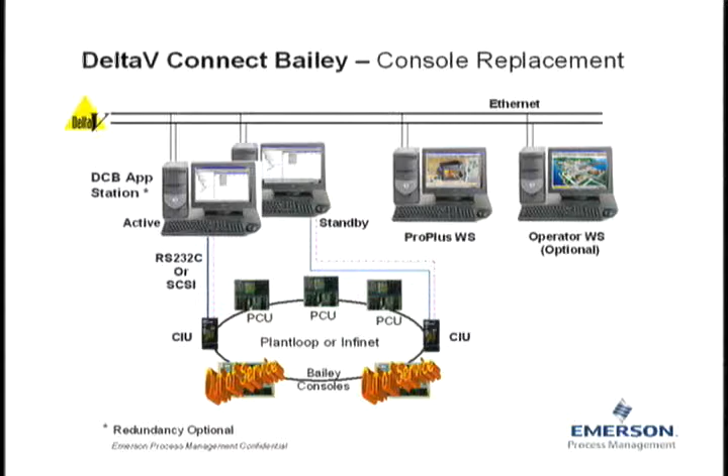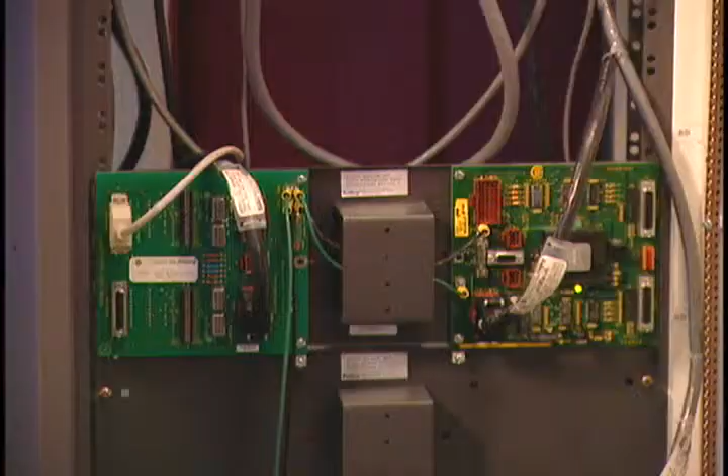On the DeltaV network, then you see the ProfessionalPLUS, which is the engineering workstation for the DeltaV system, and operator station as needed. Now, looking at the hardware in the cabinet that we have here in this demo, we have the Bailey CIU, which is in a Net90 rack or Infi90 rack. It's a CIU01 with the termination panels, the TCL, and a TMF. We actually take our application station and connect it to the serial port on the termination panel for that CIU.

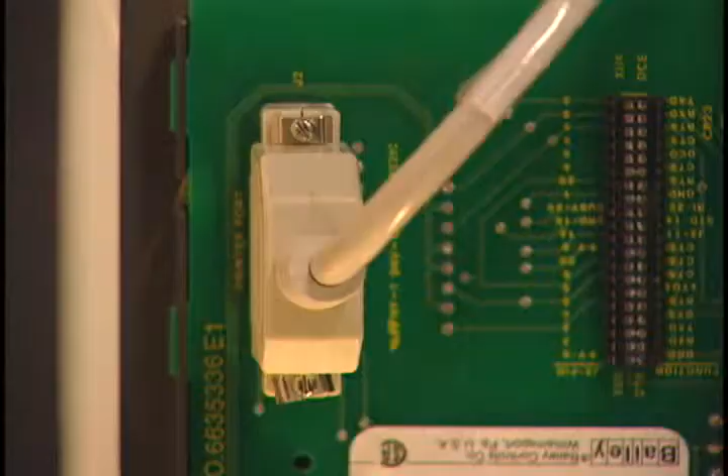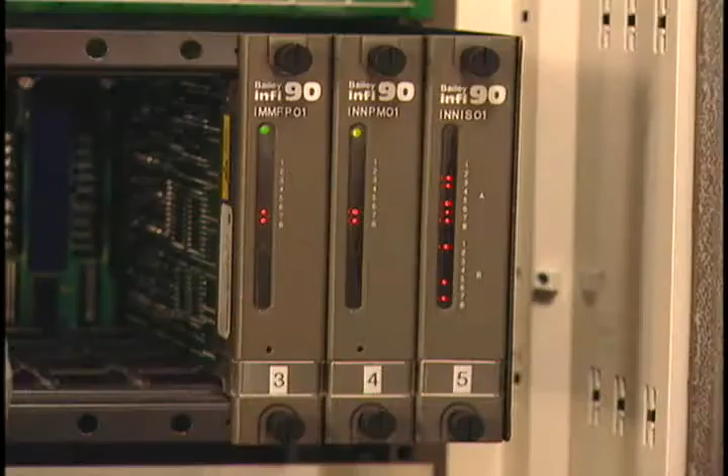And that's all we need for the DeltaV Connect for Bailey solution, because our application station connects to the termination panel of the CIU, and it will give us access to all the data that is in the Bailey system. In this case, we have a process control unit, NIS NPM pairs, and one MFP controller. This is where all our configuration resides, and we have access to it from the DeltaV Connect Bailey application station.

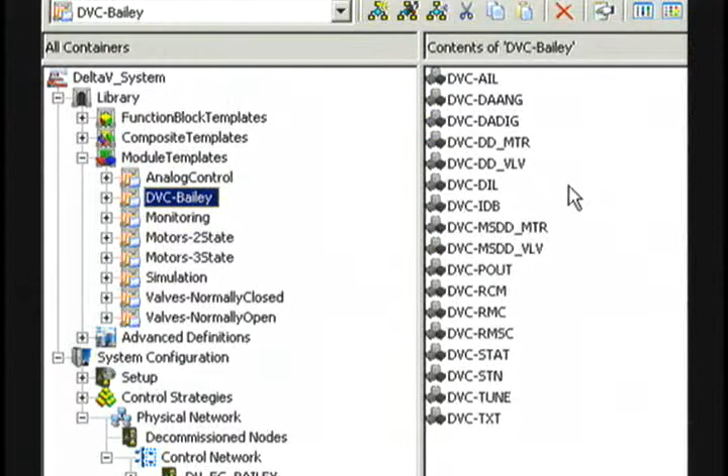Once DeltaV Connect for Bailey is loaded on your DeltaV system, under the library and under the module templates directory, we have a new folder called DVC-Bailey. This folder actually has module templates that are created specifically for the DeltaV Connect Bailey interface. And if you look at these templates, they are referencing the Bailey exception report blocks.

AIL is a Bailey exception report block, DAANG, DADIG, device driver, MSDD, RCM, station, text block, and so forth. So we do have a template created for each one of the Bailey exception report blocks. That's how we get access to the data on a DeltaV station. We create shadow blocks for each one of the exception reports off of the Bailey data highway.

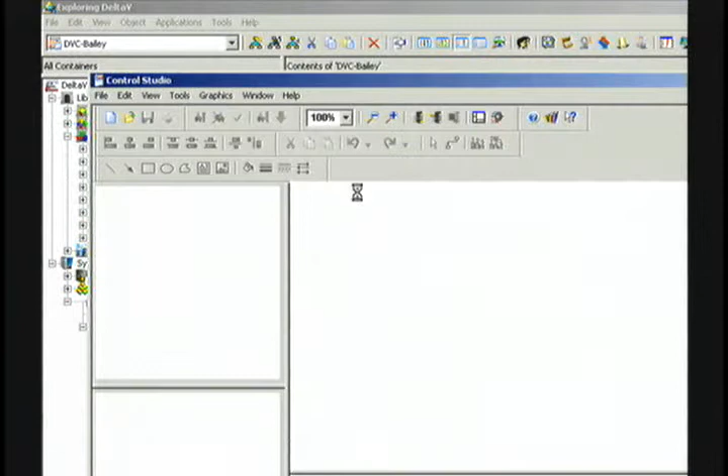Now, one template in particular that's called IDB has the IDB block in it. This is the interface definition block that we want to look at in detail. We open it with Control Studio, which is the configuration engineering environment within DeltaV. IDB, this is the block that sets up the communication between DeltaV and the Bailey systems. It has a number of parameters, but in particular, there are a couple that we are interested in.

The first one being the scheme. This will set up your interface, whether it's a single interface with redundant channels where we can actually connect to both ports on the CIU, whether it's dual interface where we can have one application station connected to two separate CIUs, or whether it's a simulate interface. In this case, we are using a single interface.

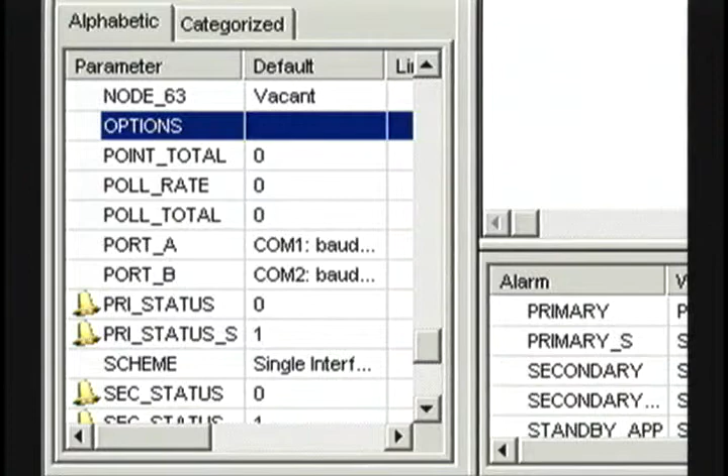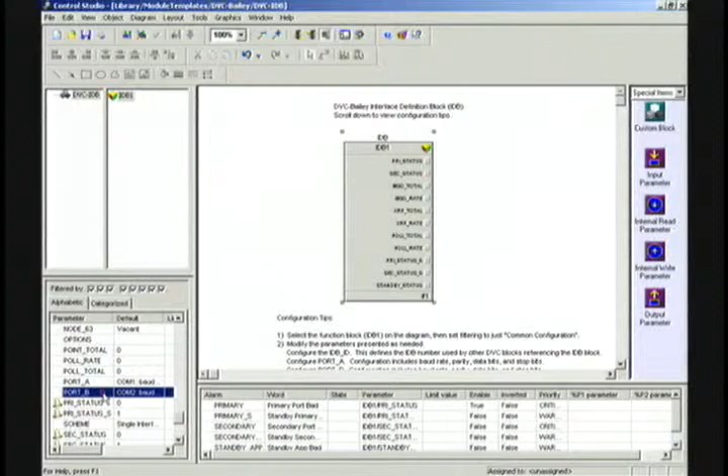One other parameter is the port A and port B. If we are connected to one serial port, we get about 300 points per second. If we're connected to both ports, we have about 500 points per second. The main thing that we need to set up here on this parameter is the baud rate, which should match the CIU baud rate on the Bailey system. So if we have a second port, we would configure port B the same way. We save this block and download it to the DeltaV application station that's running the interface.

Well, let's take a look at another module template so we can get an idea about the different parameters inside them. We'll take a look at the station, which really matches the station block in the Bailey system. Open it with Control Studio. Okay. As you see, there's only one block in this module template, just like the rest of them. We have a shadow block to match the exception report on the Bailey system.

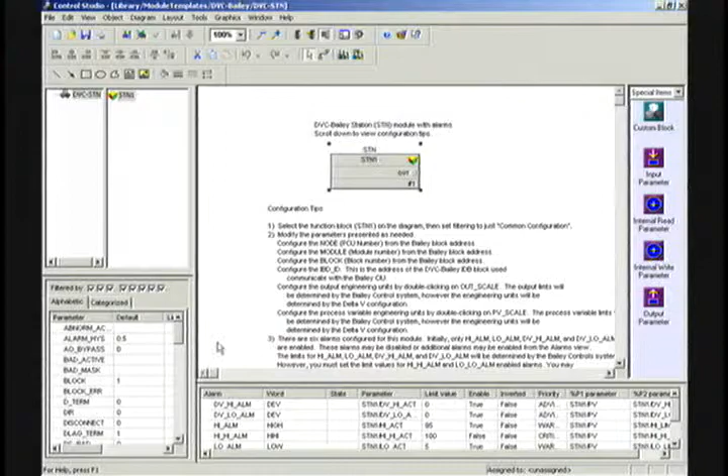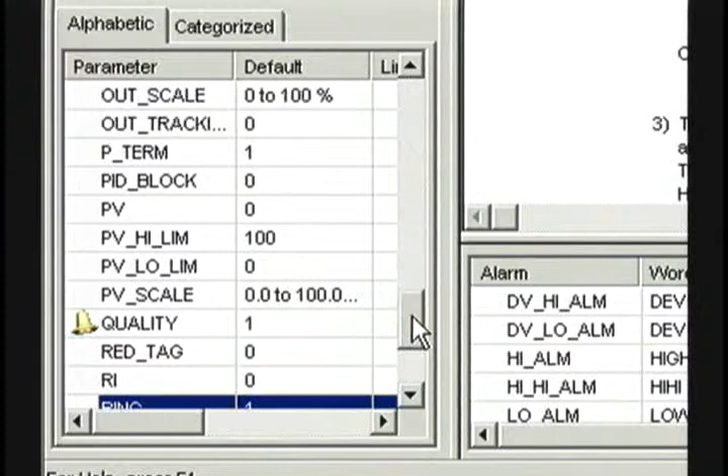And all we need to set up in this block is really the address of the Bailey station block where we're going to get that data from. One being module, we have to set up the module on it; node, which is the PCU equivalent; ring, which is the loop or the ring; then block, which is the block address inside that module. Now, after we've done the configuration for the interface, let's take a look at the DeltaV operator environment.

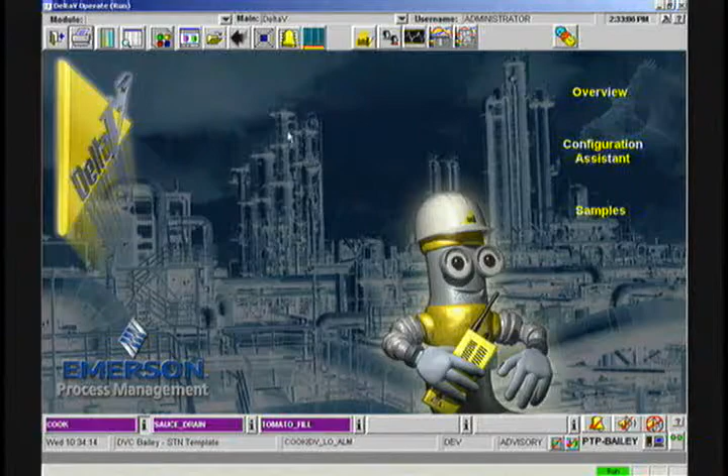Let's take a quick look at the interface. As we mentioned earlier, the module templates that we have provided in the library all have faceplates associated with them. This is the faceplate for the interface definition block, or the IDB block. And as you can see, it tells us that we have the primary port active. In this case, we only have one connection to the CIU. It is online. The secondary port is not being used.

At the same time, it provides us information on the CIU that we are connected to. It's an INICI01 in this case, and it's ring 1 node 2. And it is a time sync master.

We do have time syncing enabled between the DeltaV system and the Bailey system. Besides that, we do get some information about the data that we are transferring between both systems, some of the exception reports and the messages and so forth. So it's very, very useful information to the operator to see how the interface is working and performing.

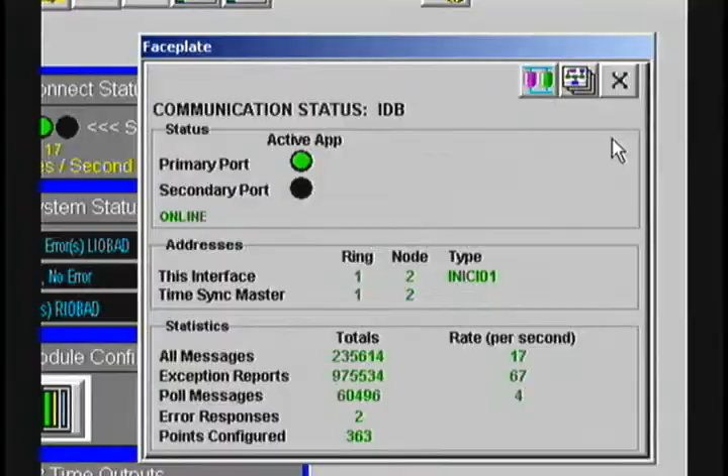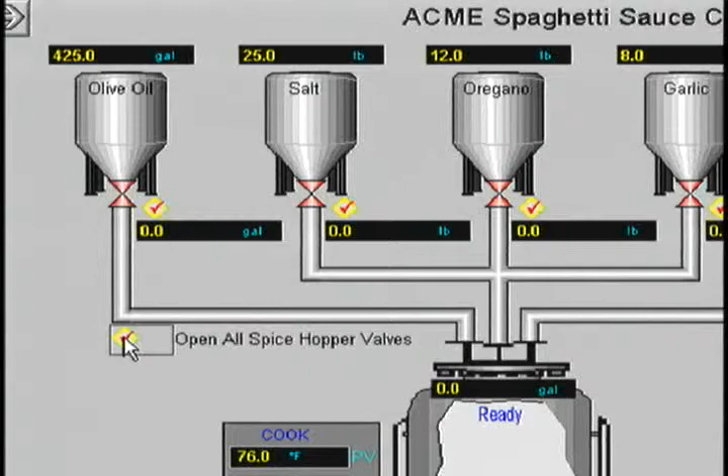Let's take a look at some other screens in this case. Here's one where we are making spaghetti sauce. Just to give you an idea, we have configured modules here for each different type of the Bailey exception report blocks. In this case, I can click on this. This will open up a faceplate. It happens to be a device driver. It tells me I am permitted to operate it.

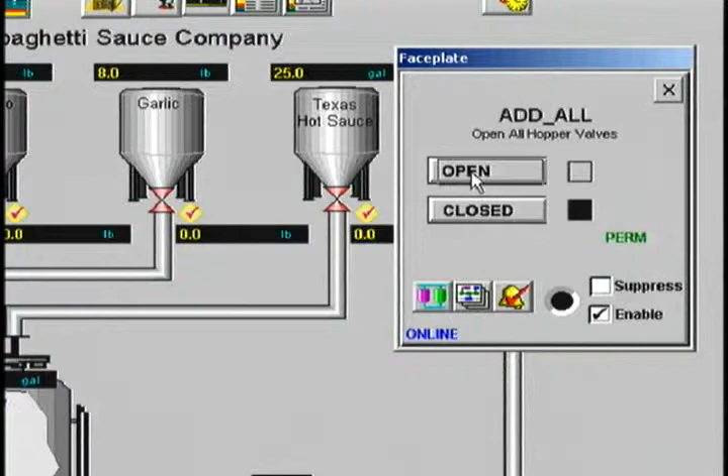One piece of information that's good here, it tells you you're online, which means the interface is working and operational. If it says offline here, that means I know there is something wrong with the interface. I can go ahead and open. This, in fact, opens all these valves to add the ingredients for our sauce that we are making, all the dry ingredients.

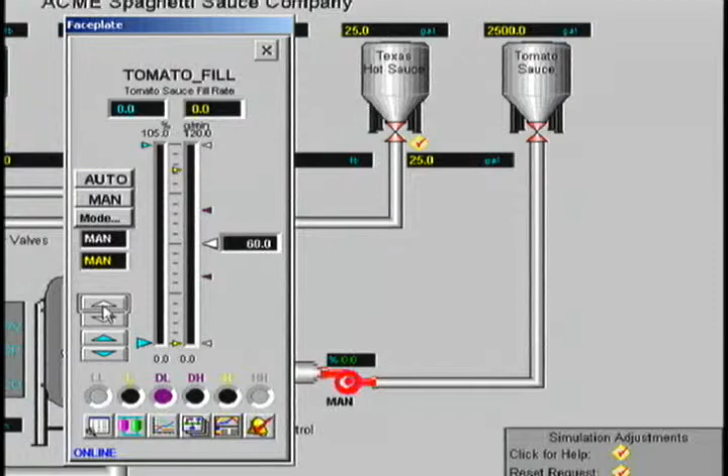Now I can click on this. This will open up the faceplate to add the tomato sauce, this pump. These faceplates, as you can see, are similar in the look and feel to the Bailey displays. They will provide you all the information that is important to the operator to control this PID loop. We've got the modes, whether it's auto or manual, or you can change it from here. We have the arrows to change the set point and the control output based on the mode.

So for example, right now we're in the manual mode. If I hit auto, it's gonna go to auto mode. And it started the pump, and now we're starting to put in some tomato sauce. I can go in and change the set point, either by clicking on these arrows to go up, or I can actually take the set point here and just drag it up to put in a new value.

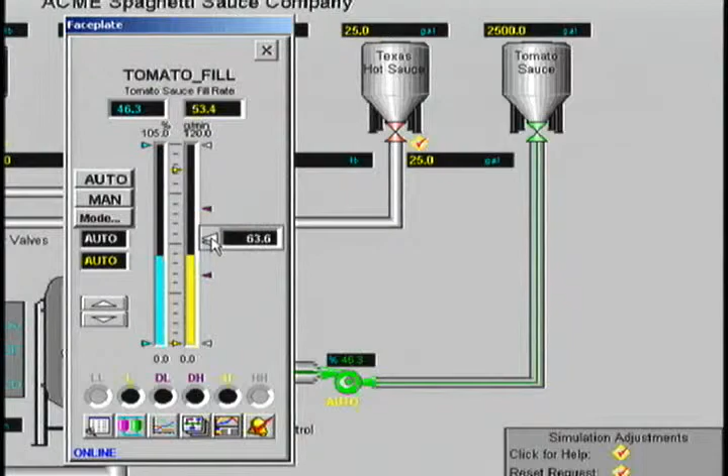We provide additional buttons on these faceplates to give us access to additional data. For example, we provide a detailed faceplate that's accessible from this faceplate that will give us the parameters for that particular point, the high and low and so forth, which are tunable from this screen too, and provide us the information on the PID block associated with this station. As we know in the Bailey system, we got a station block and a PID block that are separate. The PID block does not have a faceplate associated with it, so we provided that information on this particular faceplate to allow the operator to look at the PID block and actually tune its parameters from the screen too.

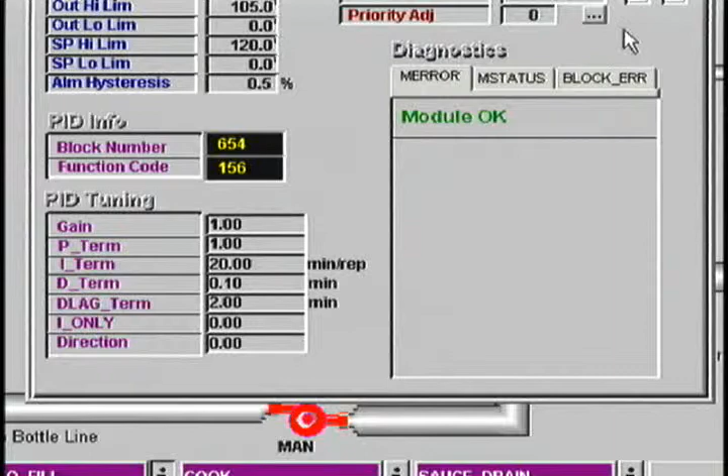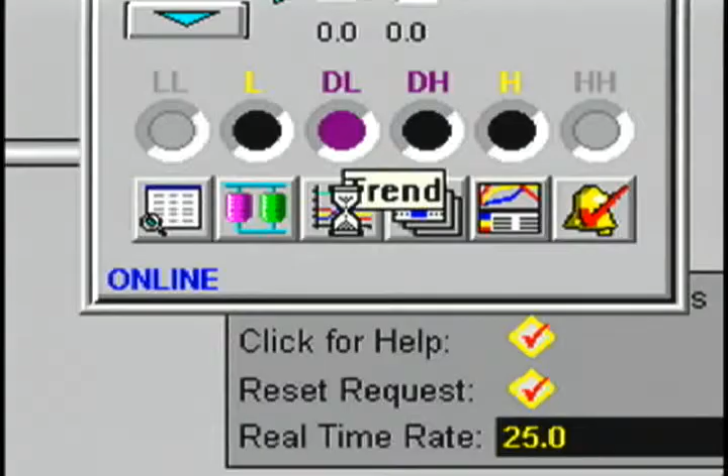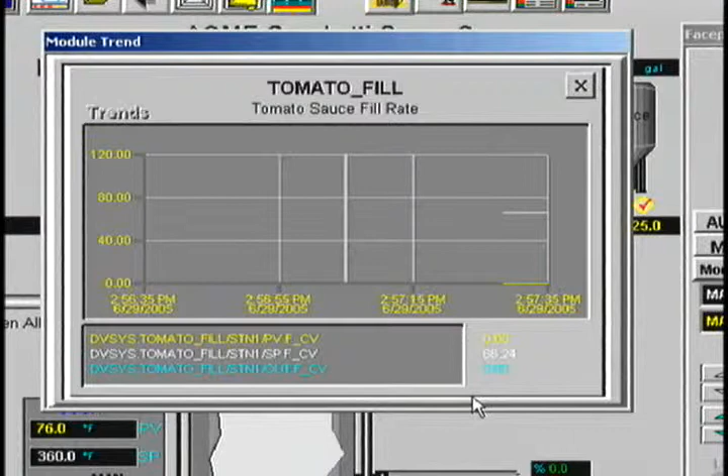In addition to that, we do provide the capability of enabling and disabling alarms from this screen, provided the operator has that access level. Okay. Some of the additional buttons on this faceplate are one that will take us to the primary display, which we are on right now. The other one takes us to the trend, which in the DeltaV system, every point has a trend associated with it, built in automatically, so you do not have to configure that separately. And in this case, we've got this trend, which is really the current real-time trend. You've got the process variable, the set point, and the control output trend in this case.

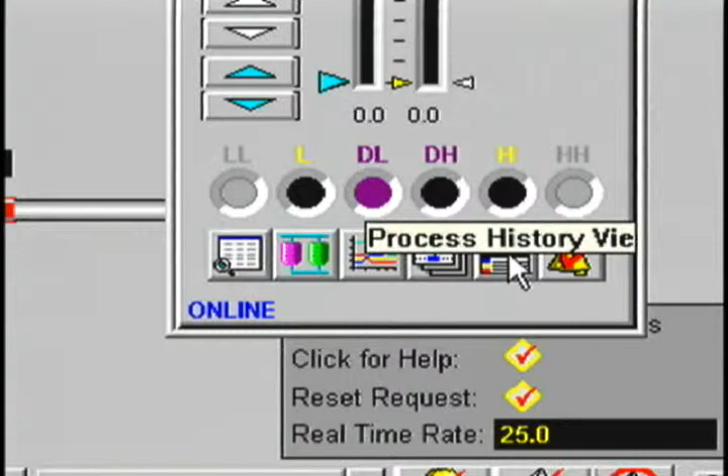Now, we can go to the Control Studio, which is the engineering environment to configure this particular point. Let's say you do have a problem with it, you want to change the configuration, you can do it from here. Or we can go to a process history view where we can view the historical data that's being saved along with the alarms and the events.

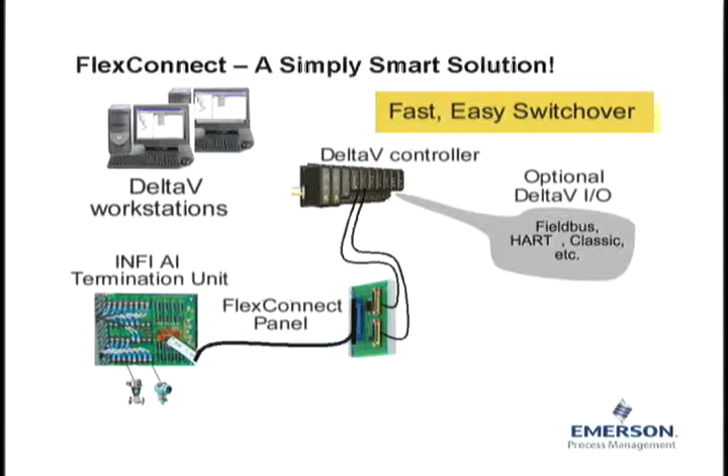Now, as you can see here, what we've done in this cabinet, we have a Bailey termination panel that we left in place. This happens to be an analog input card termination panel. This custom cable goes to the FlexConnect I/O panel that we created. Then from there on, we take a cable up to the DeltaV I/O cards.

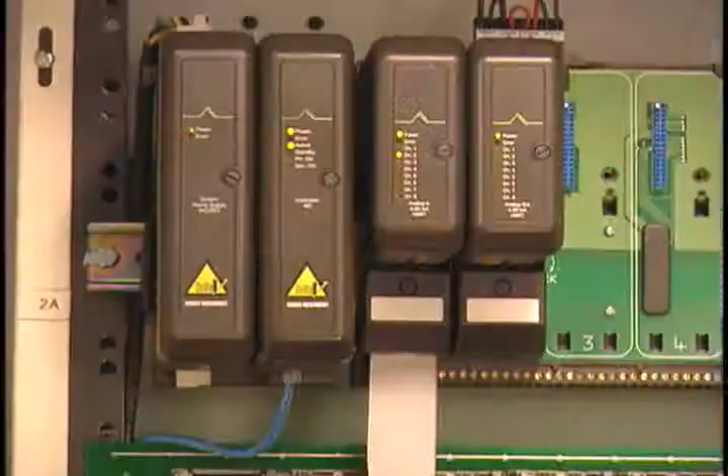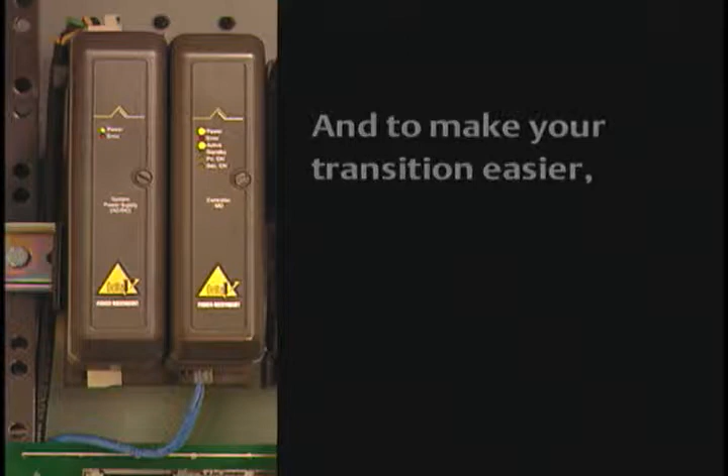In summary, let's talk about the transition options that we offer you to transition your existing Bailey system to DeltaV. DeltaV migration options address obsolescence, high maintenance costs, and increased functionality needs. DeltaV Connect for Bailey is an easy and seamless migration path for Bailey consoles, and to make your transition easier, Emerson offers conversion services to automatically convert your operator displays and your console database. FlexConnect solution for Bailey saves you time and money by easily migrating your controls and I/O while leaving your field wiring intact.